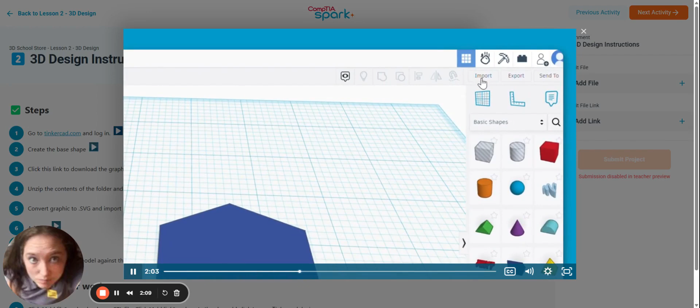We're going to go to Import. As you can see, these are the files that Tinkercad supports, and we're going to be importing a SVG file. All right, we're going to click where it says Choose a File.

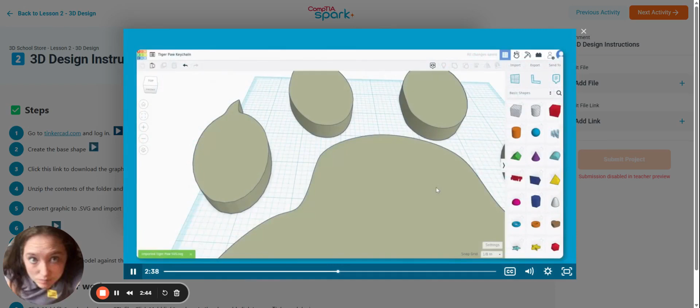Once you do that, find where you have saved your SVG file. For now, we're just going to leave everything as it is. We're going to leave the scale at 100% so you can see what it looks like when you import. So just click Import, and it does take sometimes a little while to import.

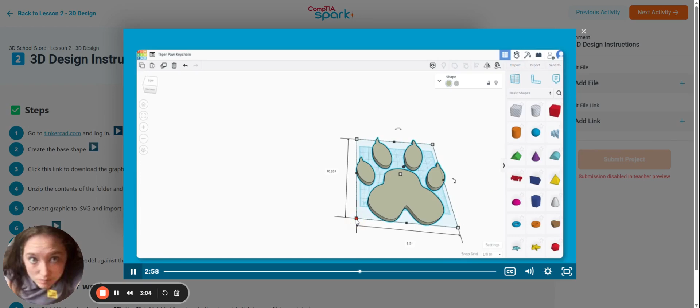As you can see, it imports very large. So we're going to have to resize our tiger paw or other item that you chose. You may have to zoom way out to get to the corner handles to change the size. So I'm going to just start by changing it to 2 inches by 2 inches.

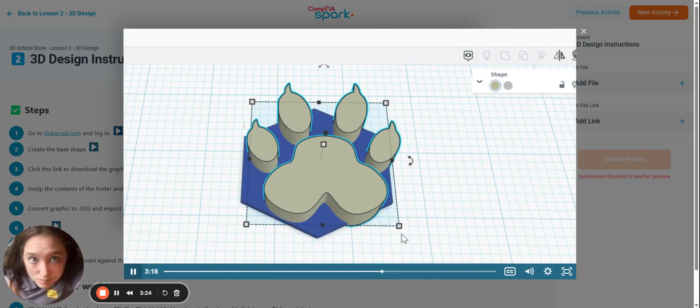Okay, now I'm going to bring it back to where my keychain base is, and now we can work on placing it. All right, I'm going to resize it a little bit more to make it smaller.

All right, I'm going to drag it towards the bottom here. As you can see, I can't quite center this. There's a couple ways we can do that. We can either use the Align tool, or we can just use our arrow keys.

One thing you can do is change the snap grid. Right now it's 1/8 of an inch. I'm going to make that 1/32, and then it will move in smaller increments. So I'm using my arrow keys to get that centered.

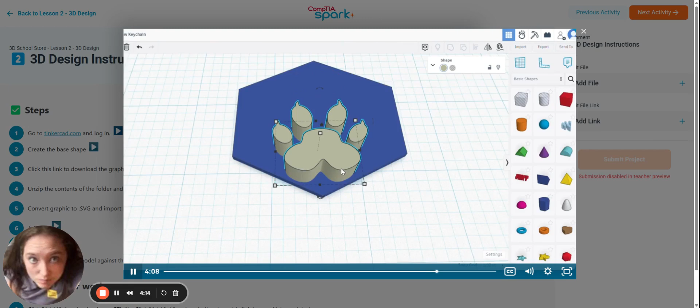I'm placing the paw near the bottom because I want to leave room at the top for letters. Also, I'm going to rotate my work plane and make the height lower. All right, I like that.

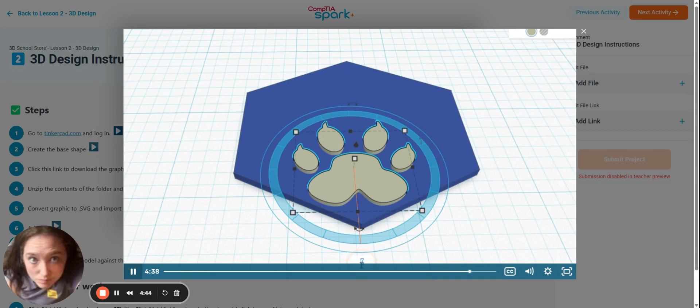If you want to rotate your graphic, when you click on it, you'll see some arrows that appear. You can just grab those arrows and rotate. You can either use the mouse to rotate, or you can type in the number of degrees. So if you only want to rotate it 10 degrees, you can just type in 10 and it will rotate the number of degrees that you type in, or you can use the arrows to rotate.

Once you have your graphic placed where you want it, you are ready to move on to the next step. Thanks for watching.